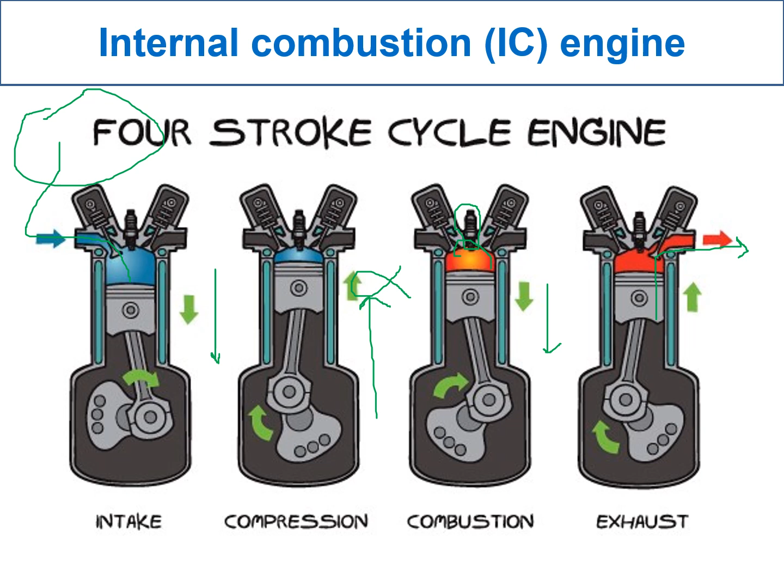If you observe the compression stroke, if you are able to compress more highly, you can produce more heat energy. Both are directly proportional, compression and combustion. If you compress very high, you get a very high combustion rate, which means a very high amount of heat energy. If you get more heat energy, you get more capacity, or it will run very fast or a higher distance. So compression is very important in the internal combustion engine.

So you can see here the four strokes in one figure: intake, compression, combustion, and exhaust. That is how it happens.

The compression rate depends on the boiling point of fractions present in the petrol. Petrol is a C5 to C9 composite, and its boiling point is 40 to 120 degrees centigrade only. For example, petrol may contain 40, 80, or 120 degree centigrade boiling point compounds. If you have 120 degree centigrade boiling point compounds throughout your petrol, its boiling point is high, so you are unable to compress it easily, and you will not produce more heat energy.

If your petrol has only 40 degree centigrade boiling point compounds, the boiling point is very low. You can compress as you like, maximally, and produce maximum energy. So compression depends on the boiling points, and heat energy depends on the compression rate.

If you observe the boiling points of different hydrocarbons, straight chain hydrocarbons have lower boiling points compared to branched, alkenes, and cycloalkanes, and aromatics have high boiling points. So if your fuel contains only aromatics, which have a high boiling point, you are not able to compress as freely, so the compression rate decreases and the heat produced also decreases.

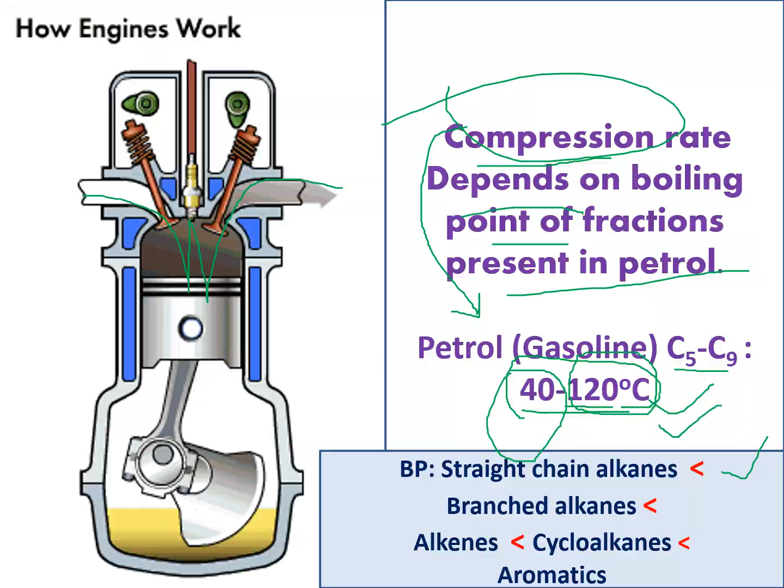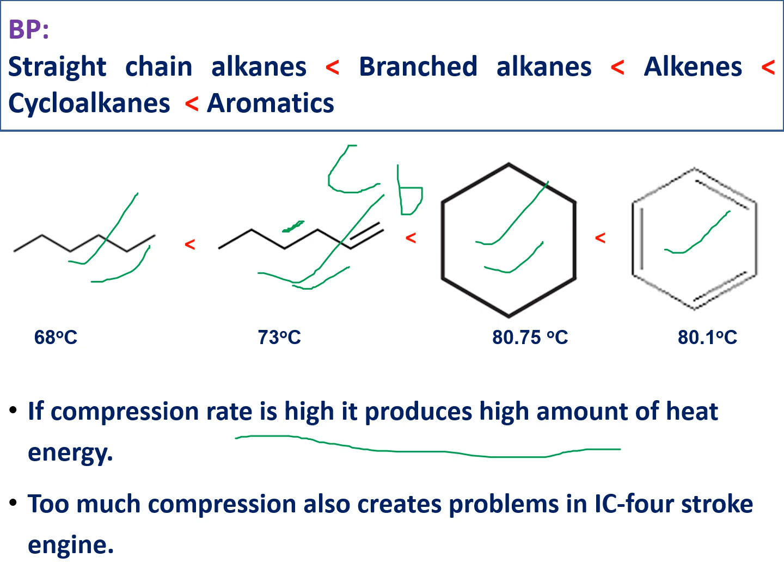But there is another problem. If you compress more than a certain limit, it produces a problem called knocking. So remember this one thing: compression is good to produce heat energy, but if the compression rate is more than a certain limit, it creates a problem called knocking. Knocking is a metallic sound produced by the exposed combustion gases when they are compressed higher than a certain limit.

There are three points. The first one is, it is a metallic sound. Who is producing it? Exposed combustion fuel gases are producing it. When are they producing it? When they are compressed more than a certain limit.

So you have a tank here. By using a piston, up to here, you can compress the fuel. Okay. So this is the capacity. So if you compress up to here, that means you are creating very high pressure.

Before combustion, fuel gases are involved in pre-combustion, and they don't have space to go anywhere, and they create sound on the metal, means on the engine. When the fuel is involved in combustion, this piston will come down. But before combustion, these fuel gases are involved in pre-combustion, and these gases make a sound on metal that is called knocking.

Knocking is a metallic sound produced by the exposed combustion fuel gases when they are compressed more than a certain limit. Why? Because gasoline is C5 to C9 carbons and has a low boiling point, 40 to 120. So due to over compression, the fuel in the IC engine ignites spontaneously, producing explosive violence known as knocking.

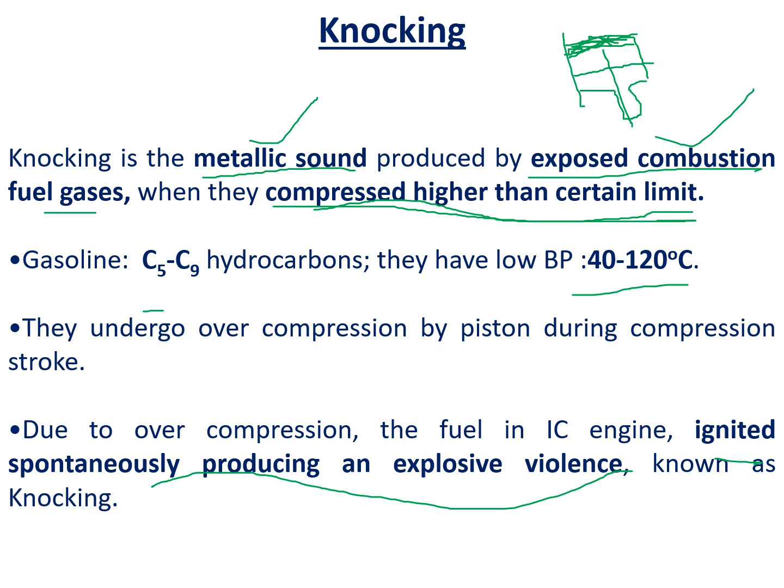Okay, so see here. Now it is only compressing up to here. If you compress up to there, more pressure will be generated. Because of more pressure, here combustion is starting. If you observe, here ignition is starting. Before ignition, they are involved in combustion and they produce a sound.

If you observe the boiling points, the boiling point is very high for the aromatics. Now my question is, between straight chains and aromatics, which is more compressible? Straight chains have low boiling points. That's why they can compress very highly, and that's why they can produce very high sound, very high noise.

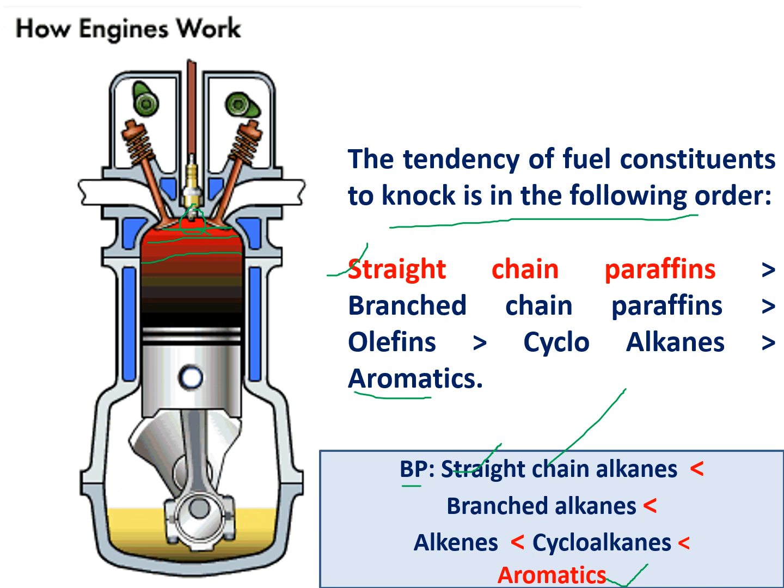So if you see the knocking order, straight chains have higher knocking property than the aromatics. Aromatics are least, but boiling points are opposite. Aromatics have high boiling points, straight chains have low boiling points. So knocking is just opposite to boiling point ranges.

Okay, so the next one is diesel knocking. Up to now what we learned is petrol knocking, in the internal combustion engine, how petrol is involved in the knocking process. Diesel knocking is the same as petrol knocking, but in a diesel engine, first of all, we will not intake diesel into the engine. We will intake air.

First we will compress the air, then we will spray the diesel over the highly compressed air molecules, then it is easily involved in the burning process, the combustion process. So here air molecules are compressed. If the air is highly compressed, the air molecules make sound, and that sound is called diesel knocking.

In petrol knocking, explosive combustible gases are making sound. In diesel knocking, air molecules are making sound. This is the only difference, the rest are the same.

Okay. And what are anti-knocking agents? An anti-knocking agent means a chemical additive which is used to decrease the knocking property of petrol or diesel. The different chemicals we use along with petrol or gasoline to reduce the noise, that is knocking, are called anti-knocking agents.

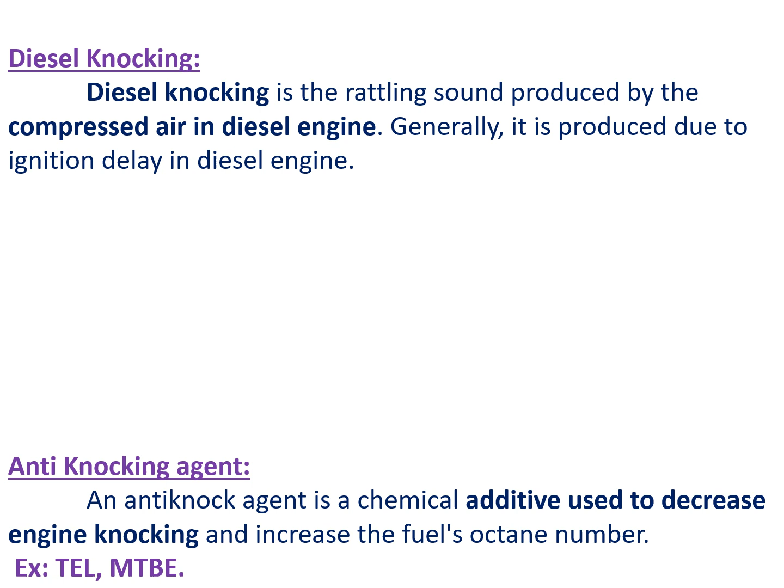Tetraethyl lead and methyl tertiary butyl ether are commonly used, but TEL is not used nowadays because of environmental issues. So the best option is methyl tertiary butyl ether. Now go for the octane number. What is octane number? Octane number is the measurement of the anti-knocking property of petrol.

Remember here, octane number is not a measure of the knocking property. It is a measurement of anti-knocking property. That means if a petrol has a high octane number, it has a high anti-knocking property. High anti-knocking property means it has a low knocking property. Low knocking property means it produces very less sound.

Okay, so just observe this trend. High octane number means high anti-knocking property. High anti-knocking property means low knocking property. Low knocking property means less sound. Reversely, a low octane number means low anti-knocking property. Low anti-knocking property means high knocking property, and it produces much sound.

Okay. So for example, if you take n-heptane, here there is a 1, 2, 3, 4, 5, 6, 7 carbon straight chain.

We already know straight chains have very low boiling points. Low boiling points mean we can compress more than a certain limit. If you compress more, they produce much sound. That means knocking is very high. Knocking is very high means anti-knocking is very low. Anti-knocking is very low means octane number is very low, and it is taken as 0. So for n-heptane, octane number is 0.

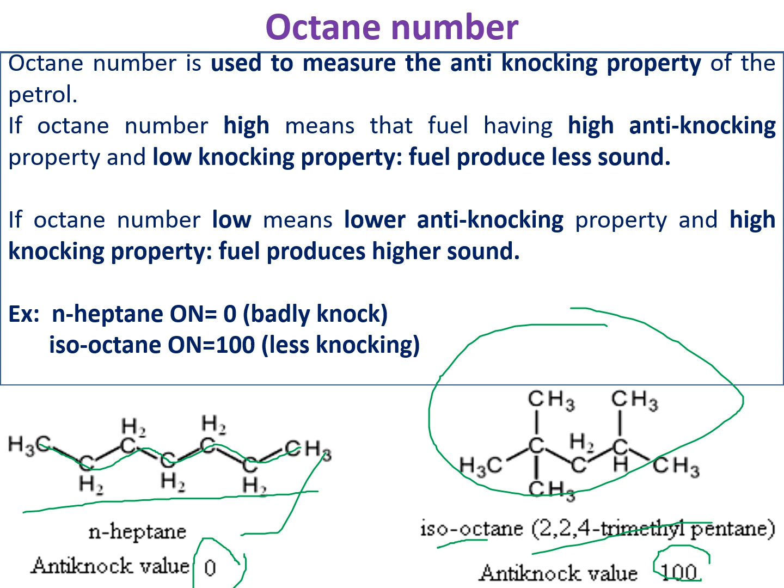Okay, so if your fuel only has isooctane, it will not produce any sound. If your petrol only has n-heptane, it produces sound. If you start here, people 1 kilometer away will come to know you are coming, like that sound will come. Okay, so that is the octane number.

Okay, next one is cetane number. Cetane number corresponds to diesel fuel. Octane number is about petrol and cetane number is about diesel. Diesel is not just like petrol. Petrol boiling point is very low; its maximum boiling point is 120. But diesel goes up to 250 degrees centigrade. Diesel has longer hydrocarbon chains than petrol, so it has high boiling points.

They are not easily involved in ignition in a diesel engine. It is very difficult to start the car. When you turn on the car, it takes some time. Between when you start the car and when it is started, there is some gap. That gap is called ignition delay. When you try to start the car, it takes some seconds. Those seconds are called ignition delay.

So cetane number is a measurement of ease of ignition of diesel fuel. How easily it is involved in ignition can be represented by the cetane number. If cetane number is high, it is easily ignited. That means there is no delay. When you start, within a microsecond, it will start. That is called high cetane number. If cetane number is low, it has an ignition delay. It is not easily involved in ignition. So that is the cetane number.

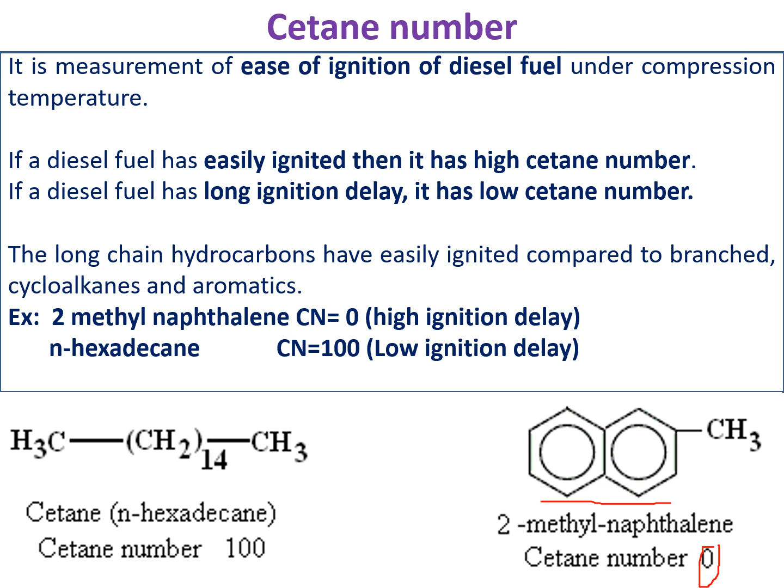But hexadecane, which means a 16 carbon chain, is also called cetane. Its cetane number is equal to 100. So if your diesel has only cetane, it is easily involved in ignition. There is no ignition delay. This is the cetane number.